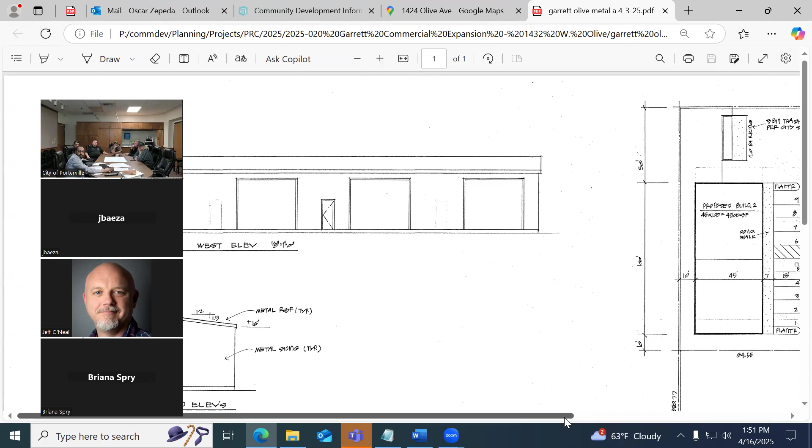That triggers, if they move beyond that for the construction, that would trigger a second fire hydrant because of our 300-foot maximum spacing. So you're having to move it down?

Yeah, they moved, no, just the buildings down. The trash enclosure I'm okay with.

Okay, I'm having them move the trash enclosure, shifted to the west, which gives us that hammerhead turnaround at the top. Okay, perfect. Because that was my concern also.

Thank you, Clayton. Next, with our building division, with James. No, I think you mentioned connectivity between the buildings. Nothing during PRC that I can think of.

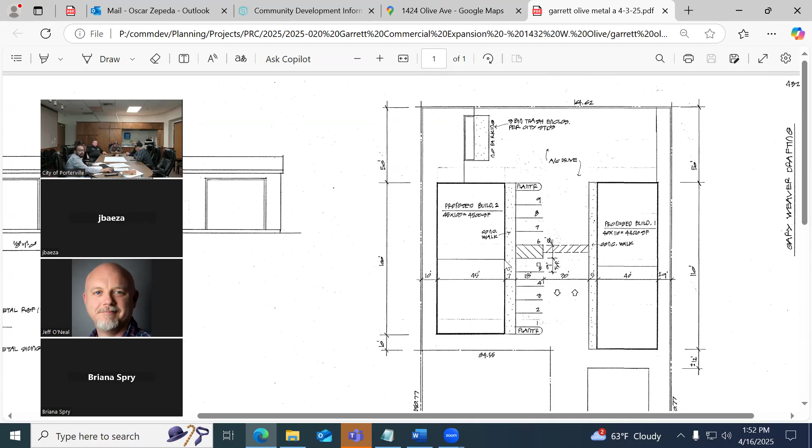Will that extend, James, just with these new ones or all the way out to? Well, I think there's a path of travel on the site plan right from the street.

Oscar, you said it'd kind of be considered like a shopping center. Yeah, once you have 4 or more uses, then it's considered a commercial center for the Porterville Development Ordinance.

So what triggers the 4 or more uses? We have 4 buildings. Right, and 4 different uses, so that would be considered a commercial center for the development code.

So yeah, jumping back to this, is this what you were referencing? Yeah, it starts from the sidewalk, but then it would have to connect to building A, and then maybe jump across to building B. Somehow it would just have to have connectivity.

And then there's this, what is this here? A pedestrian walkway possibly, just have it connect.

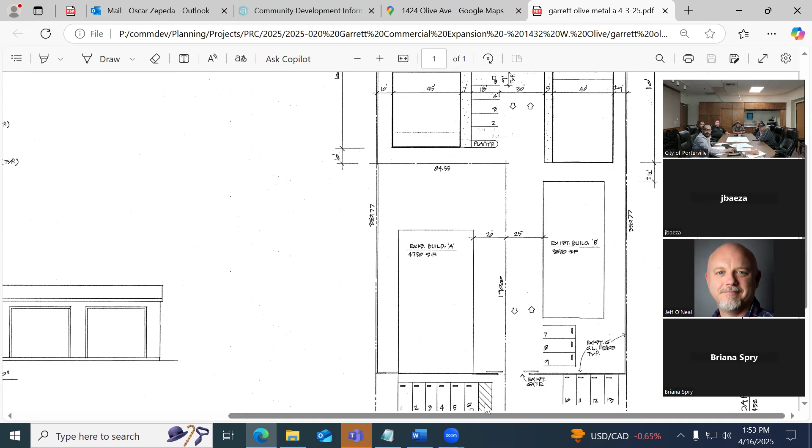Down? Jump across? Well, actually, it's gonna be 3 because isn't that a separate parcel though? No, not yet, but we're working on making it a separate one. Okay, so currently, we're going by the information we have right now.

But yeah, you're gonna do the construction after the lot split. Correct. Okay, so currently it would be, but if there was a land division, potentially you'll get around that requirement.

Yeah, so that's your intent. We already know that, yeah, so that should be done, the civil engineer said in about a week. Okay, so maybe I'm better off submitting that to you first, getting the lot split done, and then carrying on with building the 2 buildings in the back.

Correct, and then we'll review that through building permit review and make sure that you meet our minimum standards at that time, depending what's being proposed. But one of the big items would be the environmental review for the project.

Because as proposed, it exceeds 10,000 square feet. So what would be the difference?

I mean, if we try to move forward building these 2 buildings before we did the lot split, what would be the?

Well, for projects, there's an environmental review, and there are some exemptions that we're able to utilize if the project is under a certain square footage. For example, 10,000 square feet in total square footage for the property, with the addition of what was it, 8,900 and the other 3,500 square foot building, it exceeds that number, so we wouldn't be able to use some of those exemptions under CEQA.

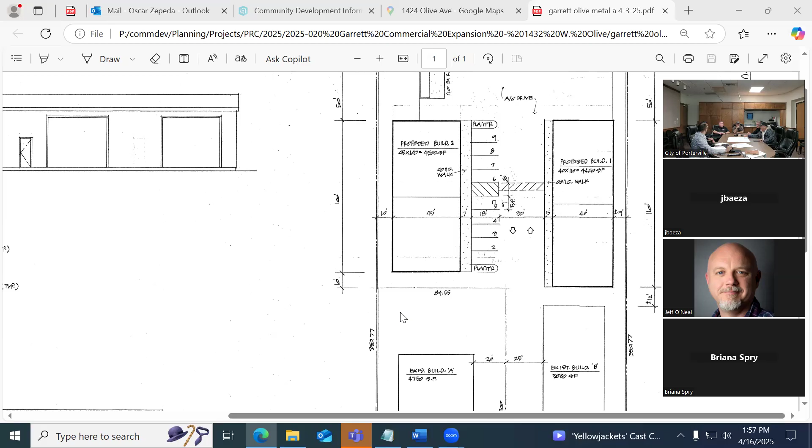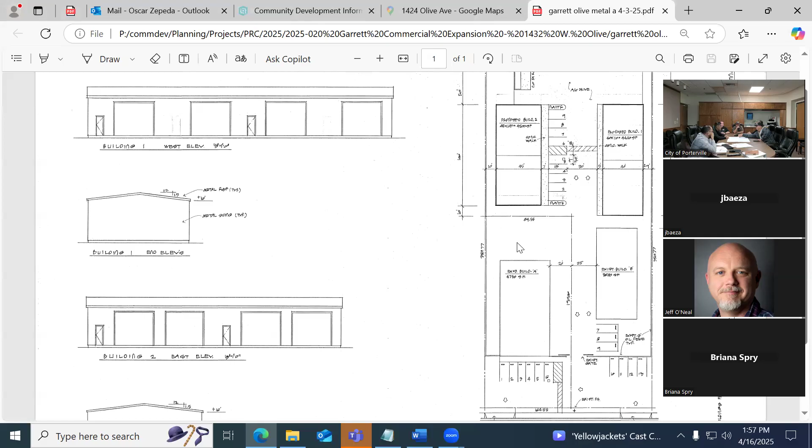Yeah, because these are going to have a pretty good valuation on them. But like I said, I'm only building this right here for my personal use. Even this building up here, at that time, these two buildings are going to be for my personal use. They're not going to be leased out to somebody else.

The only other thing on that, when you split those two lots, is making sure you record a public safety access easement, so that if in the future that other building gets sold, nobody can separate our entrance and exit. They're doing all that, making sure it can be done and that it's all recorded. That protects all of us in the future.

Well, I can look into the valuation and see if that would be a requirement.

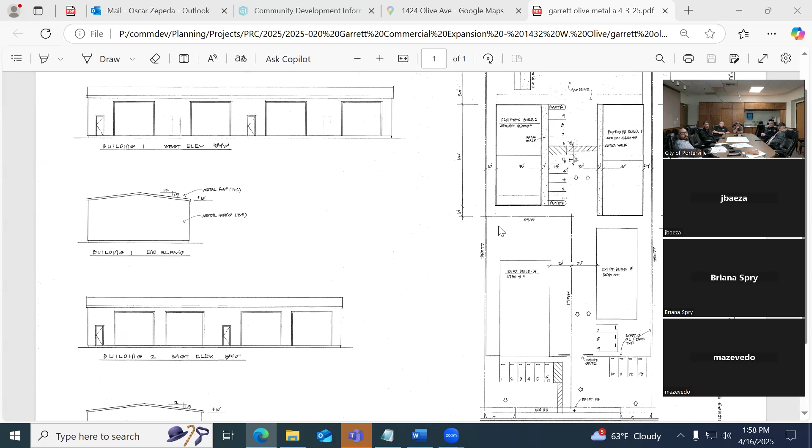Next with our public works, with our field services, with refuse, with Briana. Any additional comments? No, not really. But we will need a release of liability signed before we can service that. I think that's all I have. Thank you.

Next with Joe, field services, streets. No comments from me. Thank you.

Next with our police department, with Mark. Any comments on the project? No comment, sir. Thank you.

So that's all of staff's preliminary comments on the project. Does the applicant have any questions for staff at this time?

Darren, did we have you put a Knox box when you did the change in occupancy on the building you're splitting off? Can't remember, it's been so many years, we haven't. We'll need to put one out there, on one of the street facing buildings, so we can put a key to the gate and a key to the other buildings.

For in the event of fire, we have to go at 2 o'clock in the morning, we can just, we don't have to cut through your metal doors. So do you need that put on there now? No, it'll be at the time of construction. Okay, yeah, we'll do it at the time of construction.

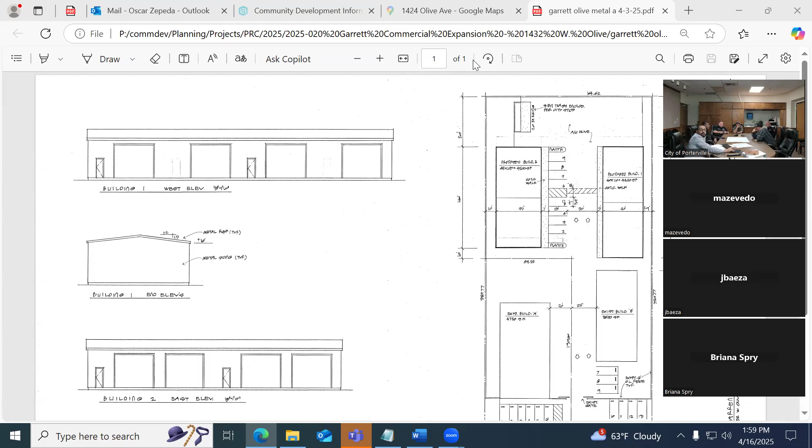So this existing fence is gonna come down, and there's not a fence gonna be put back up now. Okay, so we'll just need one Knox box there basically so we have keys to the buildings. Or we might have a fence, I don't know. If we do it, we'll put the Knox box on the outside and have keys to everything inside. Yeah, not a problem.

All right, sounds good. So we'll compile a letter outlining each department's comments on the project. Did you get that? I think we should probably put it all on hold until this is done. Yeah, that'll be your decision. Yeah, I don't want to waste you guys' time, I mean. No, we'll provide comment based off the project that was reviewed today, and then however you want to proceed based off those comments, it'll be your decision. Okay.

But it shouldn't hinder the other project. Well, when this splits, this is gonna change the square footage on that property line. Is that what you're saying, Clayton? Well, what he's saying is that the combination of these 3 buildings exceeds 10,000 square feet, but it was 4 or more uses.

What you're doing is splitting off this. Yeah, correct. So once this is split off, this no longer needs an accessible path of travel between all of the buildings and the public right of way, which is an additional expense for you to build an accessible path here, back to here, and then to the street.

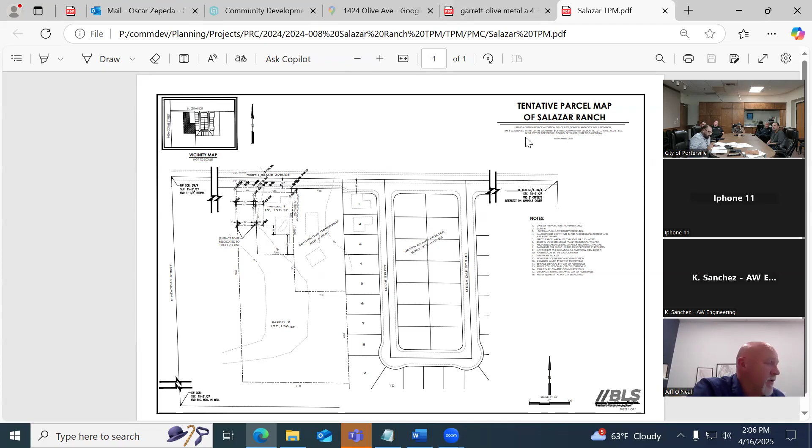Okay, so staff has presented the information regarding the general plan and the zoning and described the construction of the parcels. I don't have any additional questions related to this. I don't know if either of the two members do. However, in the event that they do, feel free to ask away.

If there are no questions from the parcel map committee, then we'll end up opening this hearing to the public and getting comment from the applicant and anybody else who's interested. Hearing none. I don't have any comments or questions.

Okay, well then we'll go ahead and open it to the public. Anybody else online wanting to make a comment? No, hearing none. I guess we'll close the hearing and bring it back to the parcel map committee for consideration.

I would move that we approve the parcel map with staff's recommendation, subject to the conditions that have been discussed. I'll second. Very good. Then do we have a vote? I'm in favor. Aye. Aye. Very good, we have 3 ayes. So the motion carries.